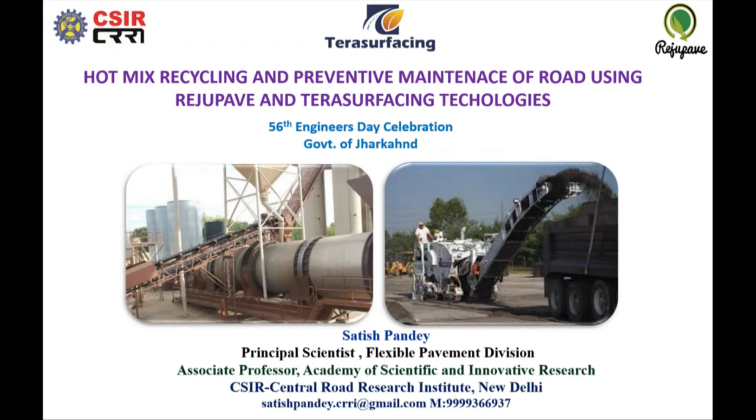In India, 95% of the road network is built through bituminous pavement. Bituminous roads, blacktop surfacing, is everywhere. And we know that every 4-5 years we require an overlay on top of it in order to improve the riding quality. This sort of overlay every year requires a good amount of natural aggregate as well as bitumen in order to prepare the bituminous mix, particularly dense bituminous macadam and bituminous concrete, which has substantial cost of production as well as requiring huge amounts of natural aggregates.

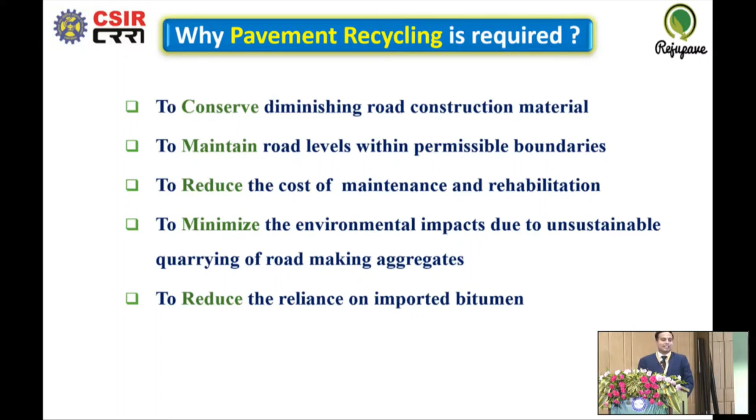As per an estimate, around 1.2 billion tons of natural aggregates are required every year in India for construction and rehabilitation of bituminous pavement. So now is the time when we should rely on the options of pavement recycling, bituminous pavement recycling, in order to reduce our reliance on natural aggregate and bitumen. Every year in India, around 60% of bitumen is imported. So if we can reuse the existing aggregate and bitumen for the production of fresh bituminous mixes, it will really be a great service to the nation, being a civil engineer.

In this direction, the CSIR Central Road Research Institute worked with Verma Industries, and under a sponsored research project, we have developed India's first bituminous rejuvenator called reju-pave, which facilitates 60 to 70% reclaimed asphalt pavement material utilization in bituminous mixes. As per the current practices prevalent under IRC and MORTH specifications, we can hardly reutilize 20 to 25% RAP in recycled bituminous mixes. But with the help of this reju-pave technology, we can reuse 60 to 70% RAP in the bituminous mix.

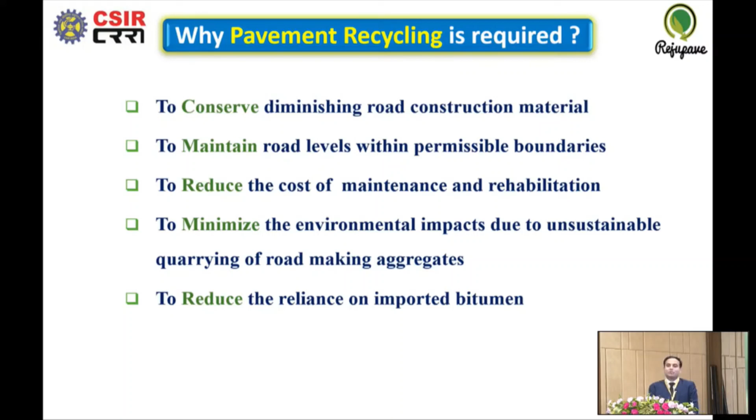The reclaimed asphalt pavement material, for your information, is primarily composed of natural aggregate and oxidized binder. When you mill the distressed bituminous surfaces, RAP is extracted, which comprises the natural aggregate and oxidized bitumen binder, and this binder in the RAP may be in the range of 3 to 4.5%. With the help of this reju-pave rejuvenator, we can replenish the oxidized properties of the bituminous binder and reutilize it into fresh bituminous mixes. So in parallel, we are reusing the natural aggregate retrieved from the distressed surface. Besides that, the bituminous binder, which is almost dormant, we can reactivate and reutilize into the bituminous mixes.

This rejuvenator is a kind of bio-oil based liquid rejuvenator which we can utilize directly into the bitumen tank along with the virgin bitumen binder, or spread directly on the pug mill on top of the RAP, reclaimed asphalt pavement material. With the help of it, you can redo or recycle bituminous mixes like dense bituminous macadam, bituminous concrete, semi-dense bituminous concrete, and also use it in stone matrix asphalt.

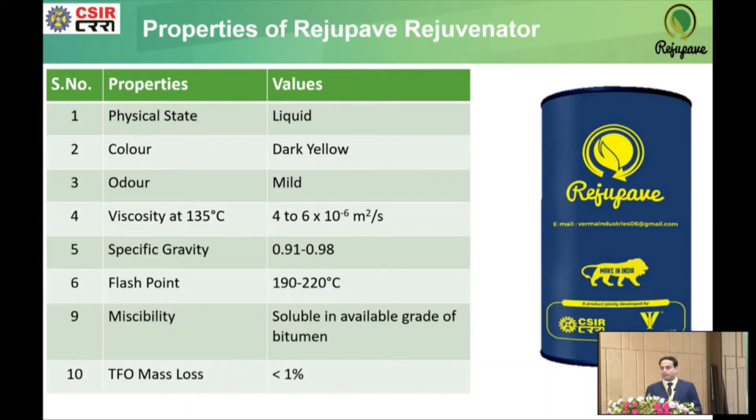On one of the NH53 National Highway sections in Surat, I am utilizing 50% reclaimed asphalt pavement material along with processed steel slag aggregate. So in parallel, whatever distressed material has been recovered, we are reutilizing it with processed steel slag aggregate, so there is no natural virgin aggregate inside it. The balance quantity of bitumen, about 1 to 2%, can be added with the help of a virgin VG40 or VG30 grade binder. In this regard, we have received the patent - it is India's first bio-oil based rejuvenator.

Most rejuvenators in India are imported, but this is the first developed through natural, renewable resources, and being bio-oil based, it is environmental friendly too. Since the majority of rejuvenators are derived from petrochemical material, but this is completely bio-oil based, it facilitates high RAP utilization without altering the rheological properties of the bituminous binder.

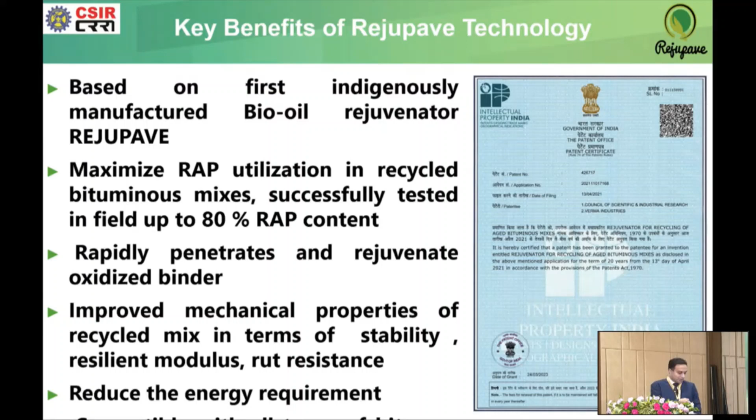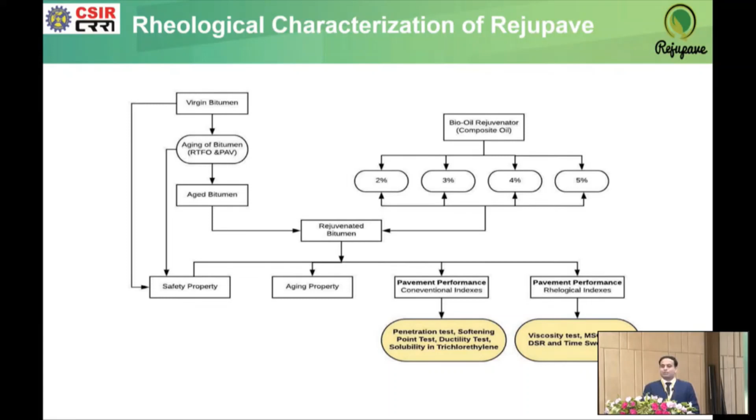We conducted extensive rheological tests during its developmental stage, which comprised dynamic shear rheometer analysis, pressure aging vessel testing, and all that - it's a complete scientific study. We have published a couple of papers on it, which you can find on Google regarding the technological aspects. Without going into the technical details, this is the dynamic shear rheometer test using RejuPave.

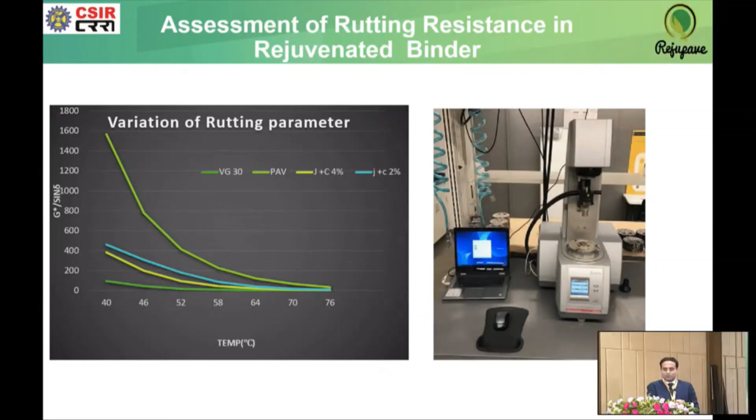I would like to highlight the process involved in the recycling aspect. So the majority of bituminous roads have surface cracks, map cracking on the surface, which is primarily due to the oxidization of bitumen.

But on top of it, if you do a bituminous overlay, if you put a new bituminous layer like DBM or BC, 30, 40, 50 mm DBM, 40 BC, after some time these cracks can be reflected into the new layer also. So the service life of your new layer will remain limited to only 3 to 4 years.

So when you put a new layer on top, what you normally do is use natural aggregate along with virgin bitumen to prepare a fresh mix. Instead, we can mill the material from the distressed bituminous surface, bring it to the hot mix plant at the project site, classify the RAP into coarse and fine RAP, and then develop a job mix using RejuPave rejuvenator. 60 to 70% RAP material can be reutilized into the fresh bituminous mix.

This brings down the cost of production by 30 to 40%. This is a substantial saving. Besides saving natural aggregate and bitumen, you are reducing the per ton cost of production of your bituminous mixes.

Now what are the added advantages? This is in terms of circular economy, conservation of nature, and all. What's the added advantage in terms of durability? This RejuPave rejuvenator retards the oxidation process of bituminous mixes. So if you put this rejuvenator in the recycled mix, it will prolong the oxidation process. Whatever new surface you are laying, this surface is going to last at least 6 to 7 years, as oxidative hardening will be very slow in this type of surface.

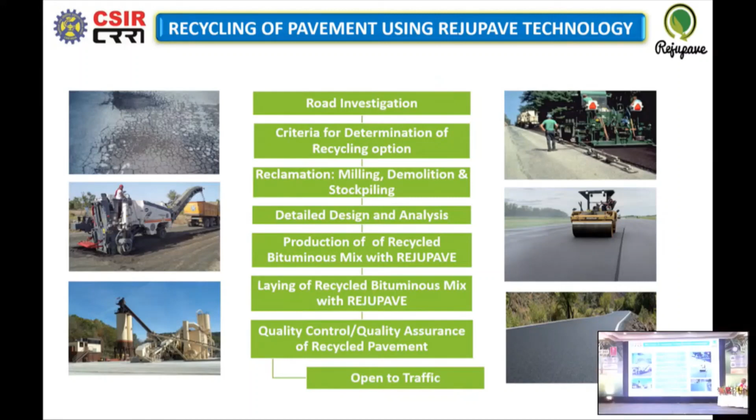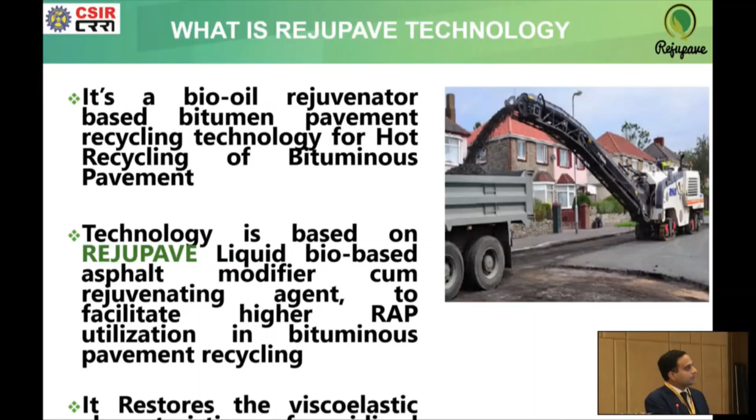So we demonstrated this particular technology on a couple of projects in India. This is a glimpse of one of the distressed bituminous roads of Delhi PWD. This is one of the ring road sections, one of the busiest roads.

Here you can see there is extensive map cracking. So we carried out extensive analysis by extracting bituminous cores to find out the quantum of distress and its depth, whether it was limited to the surface course or had gone up to the dense bituminous macadam layer. Based on that, we developed this entire study and extracted the bituminous material from the road surface.

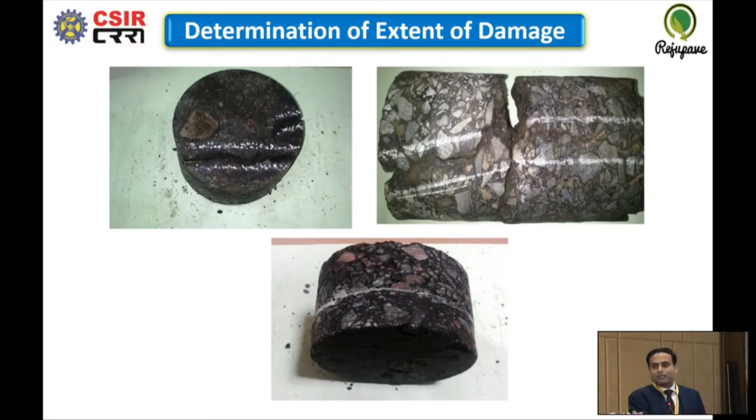This is a glimpse of RAP, reclaimed asphalt pavement material extracted from the distressed bituminous pavement. It contains around 3.5% bituminous binder, and a good quantity of natural aggregate. It is all natural aggregate.

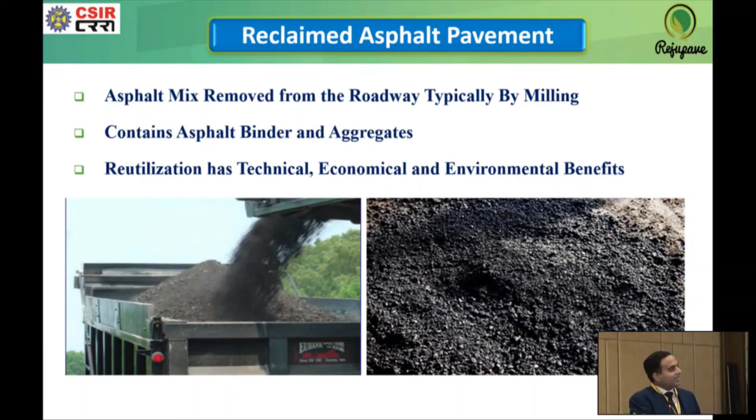So we reutilized this by classifying it into coarse and fine RAP, segregating it into minus 10 mm and plus 10 mm, and with this we devised a mechanism to put it into the hot mix plant and get it reutilized.

Pavement recycling technologies can be broadly classified into 4 categories: hot in-plant recycling, hot in-place recycling, cold in-place recycling, and cold in-plant recycling. So all your FDR technology is about cold in-place recycling. The majority of FDR technology is about cold in-place recycling.

But the major challenge in this kind of technology, whether cold in-place or others, is that all of them are stabilization mechanisms. It never gives you a perfectly bonded layer.

So it's a sort of a stabilization of an existing material, and the heterogeneity of the material is another major concern, since you never know what kind of material is coming out from the underneath layer, as the entire extraction, mixing and laying process is carried out at the same time. So there is no control on the material quality. Whatever material is coming out, it is going inside the pavement.

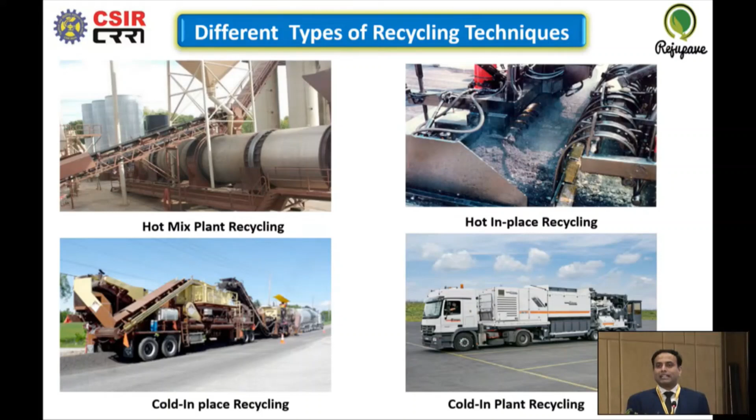But in case of hot in-plant recycling technology, since you extract the RAP from the bituminous layer and then segregate it into two categories, we have very good control on the mix properties. With the help of that, you can construct a good quality pavement surfacing at an economical cost.

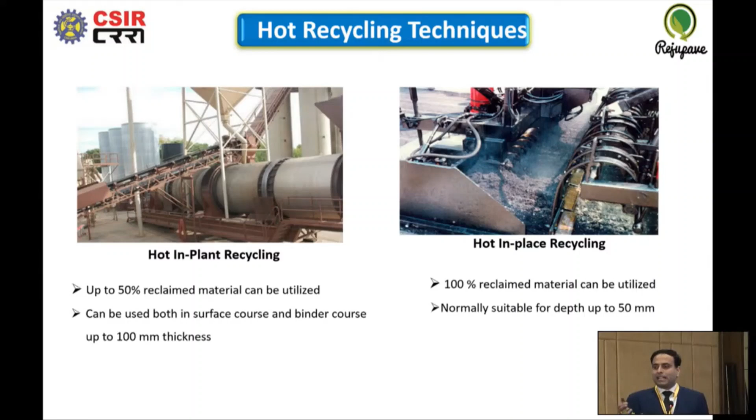So up to this hot in-plant recycling process, the maximum RAP utilization is 25 to 30%, but with the advent of this RejuPave technology, we have successfully utilized up to 70%. These are the typical hot mix, hot in-plant recycling plants, where we can add the RAP in multiple ways. Depending upon the mechanism of RAP addition, we can quantify the RAP utilization into the existing hot mix plant, and the existing hot mix plant can be refurbished for higher RAP utilization at a very economical cost.

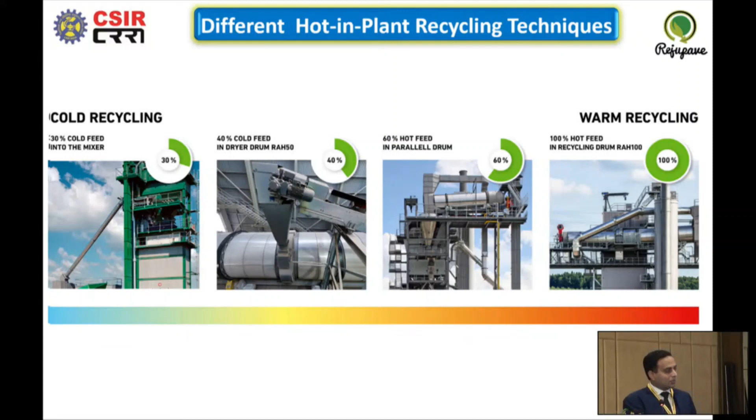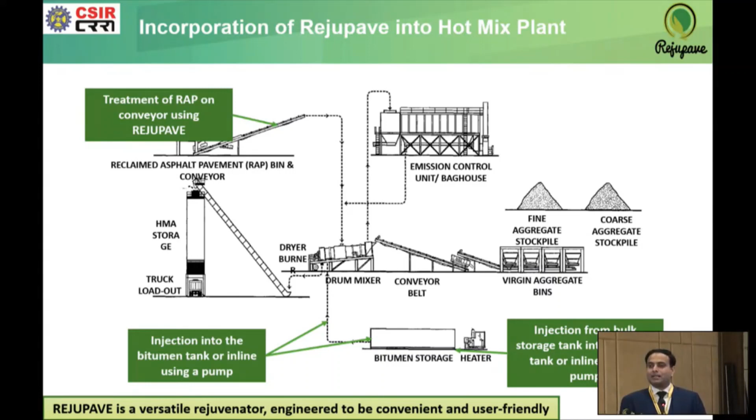Now where can we put this RejuPave rejuvenator? It can be added into the virgin bitumen tank at the requisite dose, around 0.5 to 1% by weight of virgin binder, so that too is quite economical in nature. Or it can be directly sprinkled on the oxidized RAP inside the pug mill. So these are the two ways we can put the RAP rejuvenator inside it.

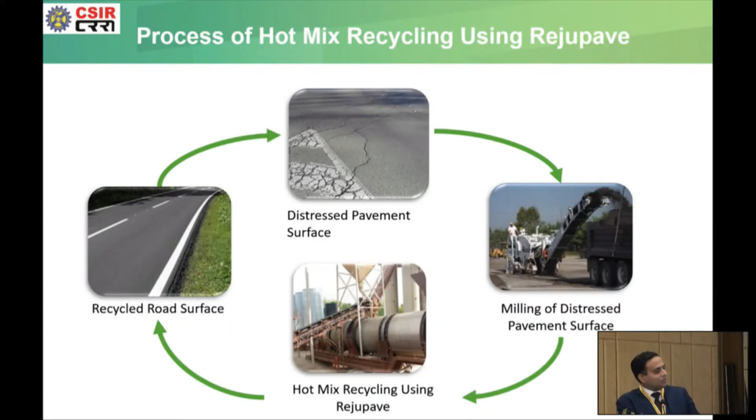So it's a glimpse of a hot mix plant where we can do all this. This is a typical cycle: a distressed pavement, then milling of the distressed pavement surface, then hot mix recycling using the hot in-plant recycling technique, and then laying of the recycled road surface.

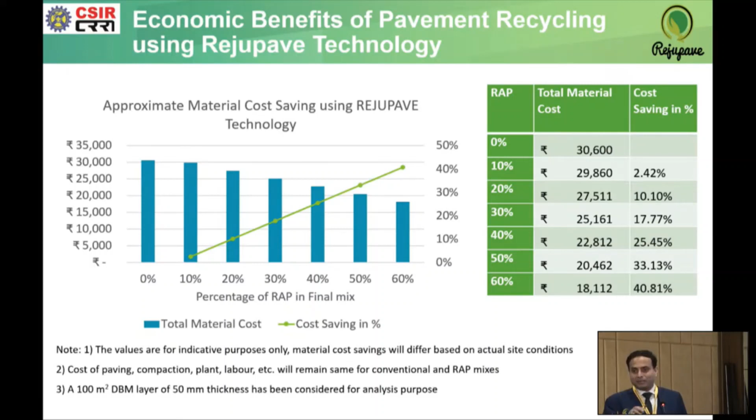Now in terms of cost saving, if we go with different RAP percentage utilization, right from 10% to 60%, then the net saving on the per ton production of bituminous mix will be 40.81% reduction in the cost of production, since that much quantity of aggregate and bitumen is being saved. So it's altogether a very cost-effective, economical and eco-friendly process, since you are reducing energy consumption as well as greenhouse gas emissions, as we are not putting in any virgin material, whether aggregate or bitumen, for the construction.

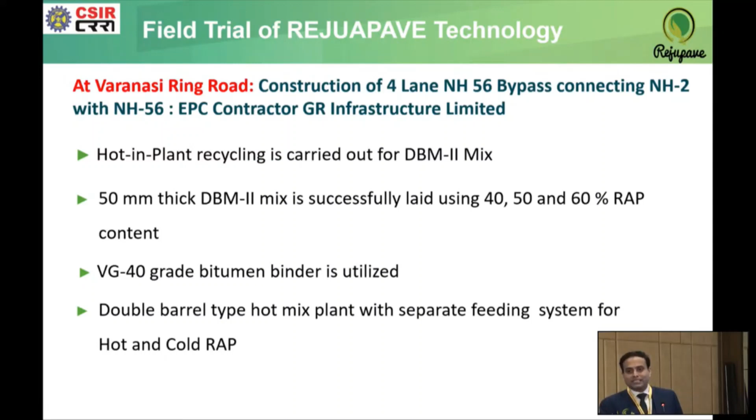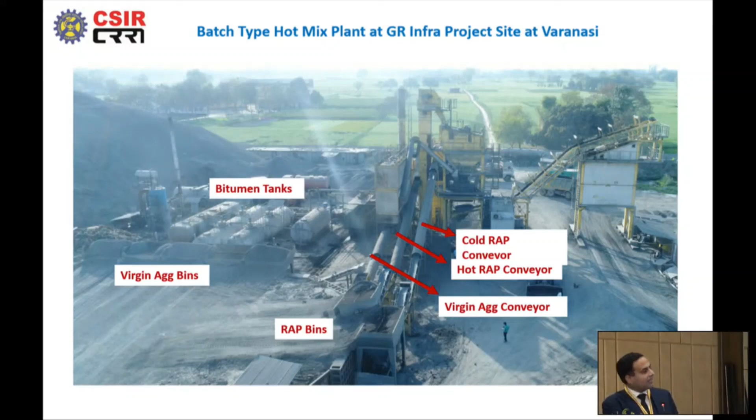So this is a glimpse of the different roads we have constructed so far using this technology. The first project is the Varanasi ring road project with GR Infra. Here we utilized the Marini hot mix recycling plant, and we used RAP in the tune of 40, 50 and 60%. This is a glimpse of the Marini plant.

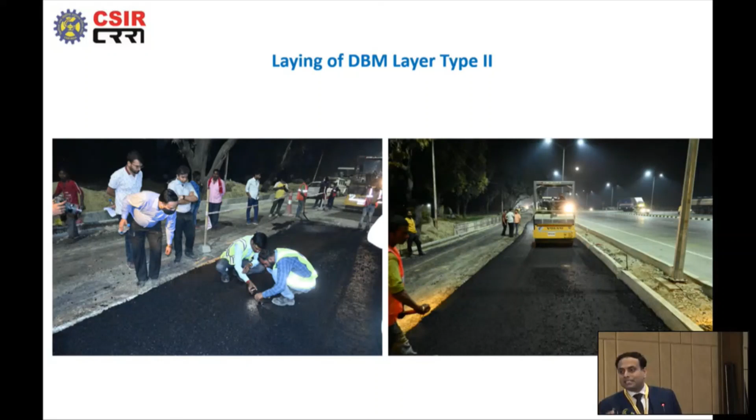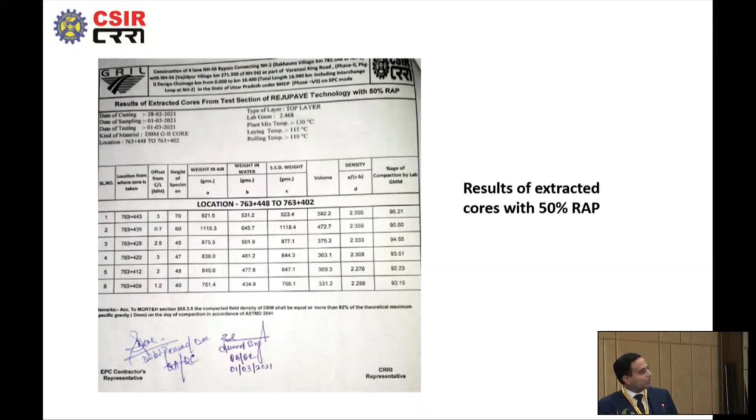So it's a kind of a very big accomplishment on the project site. These are the test results we have recovered, duly signed by the GR Infra road project team as well as the CRRI personnel. Now the second project is on NH34 with Cube.

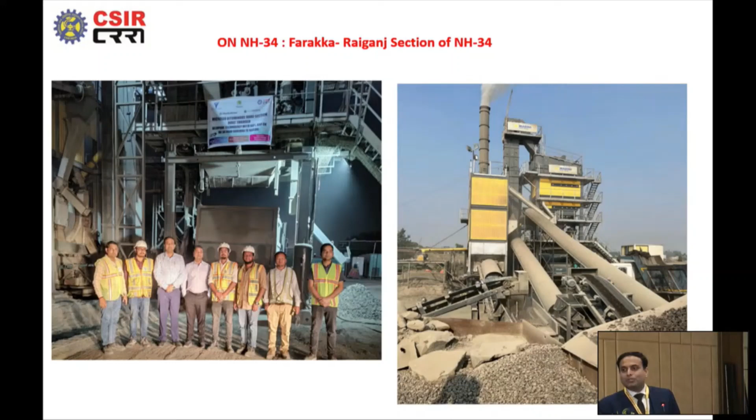On this particular location, we once again utilized RAP in the tune of 50% by weight of the overall mix, and we constructed around 1.5 kilometers of a 6-lane section there using this particular rejuvenator, utilized in the binder course layer, dense bituminous macadam layer, with polymer modified bitumen. The virgin binder was polymer modified bitumen, but the RAP was containing VG40 grade bitumen, and we utilized it for the construction.

And now, henceforth, we are utilizing this for the construction of NH53 as well as two projects in Delhi PWD, where we are using this particular product for construction.

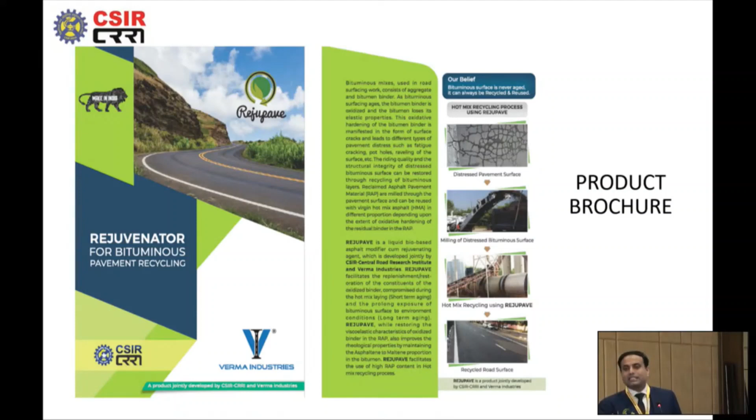So in similar fashion in the state of Jharkhand, for the rehabilitation of distressed bituminous road network going on for fresh bituminous overlay, you can adopt hot in-plant recycling technology, which can not only save natural aggregate and virgin bitumen but also preserve our ecosystem, since it reduces our reliance on natural aggregate, which in turn reduces the quarrying and mining of natural aggregate causing serious environmental impact across the nation. So that's all about Rejupave.

The next one is Terasurfacing technology. Let me give you a brief about it. It's a preventive maintenance technology of 8 to 10 mm thickness. One important aspect is that we entirely use industrial waste material - it's based on fly ash, steel slag, or marble dust.

In Terasurfacing, we can utilize 100% steel slag fine as a substitute for natural aggregate for preventive maintenance of the road. The thickness of this treatment is around 8 to 10 mm. It is completely an ambient atmospheric temperature based technology which does not involve any heating of bitumen and aggregate.

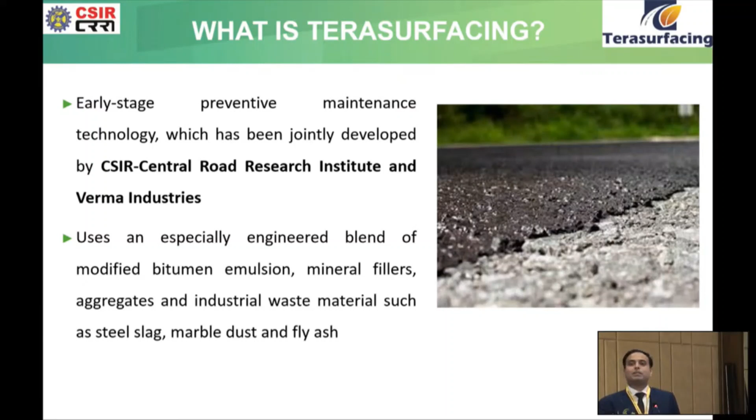All of you might have heard about the micro surfacing technique, where an 8 to 10 mm thick layer can be laid on the road surface for periodic renewal or preventive maintenance. In place of that, Terasurfacing is specifically based on the industrial waste steel slag. With the help of a micro surfacing machine, you can lay this special treatment on distressed bituminous roads, and prolong the service life of the existing bituminous surface. We carried out successful implementation of this technology at 4 locations in India.

Recently we accomplished this work in Surat, Hazira, where we utilized processed steel slag aggregate fines of ArcelorMittal Nippon Steel for construction of this road. One important aspect is that it's a quick rehabilitation method - in situ preparation and in situ laying mechanism. You can open the road for traffic movement within 2 hours itself, since there is no heating of aggregate and bitumen involved. Besides that, the cost of maintenance is also very less.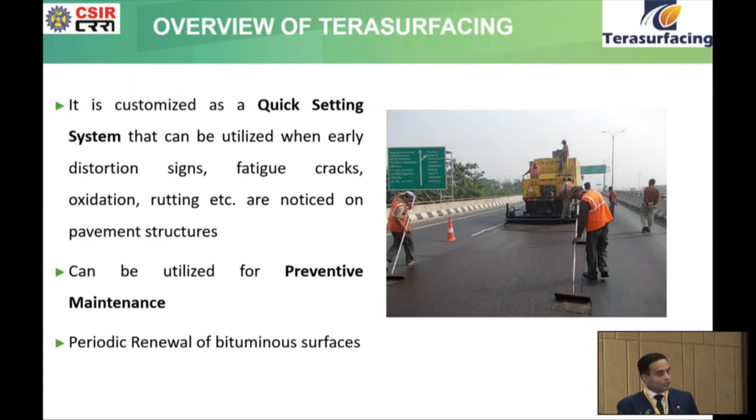The entire cost of the treatment varies between 120 to 140 rupees per square meter, which is substantially economical compared to conventional treatment. Another important aspect is that if your cement concrete pavement is showing early signs of distress, this Terasurfacing layer can be put on top of it, and it will reduce the quantum of cracking in the surface. So that's a glimpse of the preventive maintenance benefit using Terasurfacing technology.

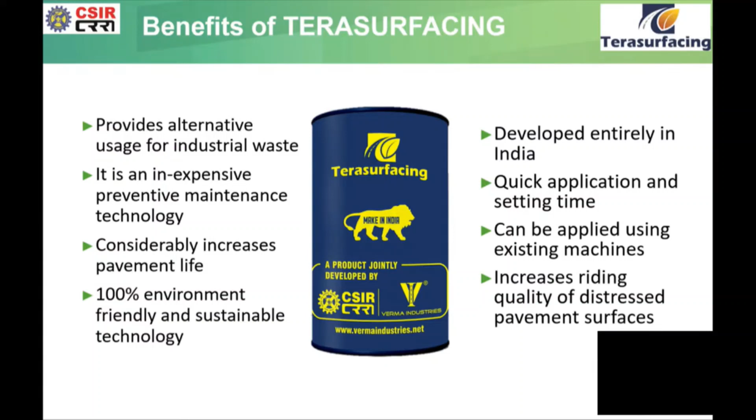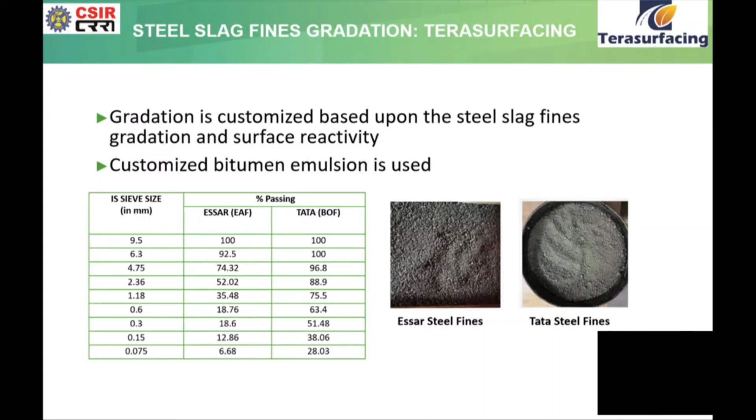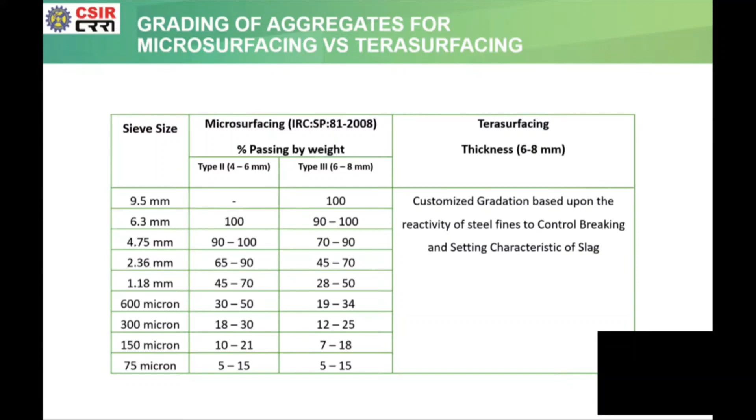You can do it in the state of Jharkhand using Bokaro Steel Plant's steel slag, as well as Tata Steel Plant's. It's once again a technology which promotes the circular economy, since it reduces the generation of waste material. We are utilizing the waste for road construction, so it's a kind of waste-to-wealth scenario.

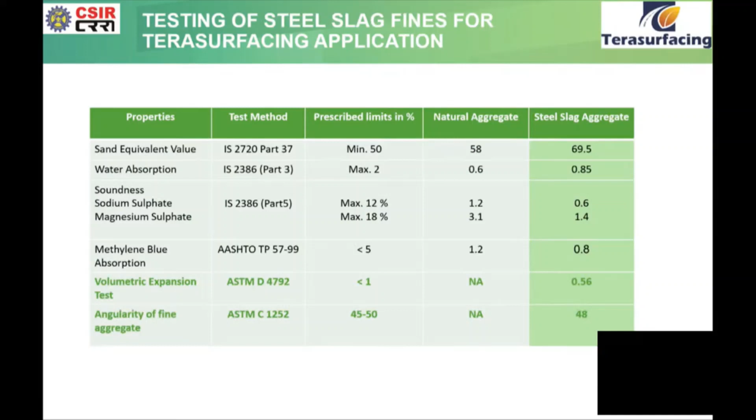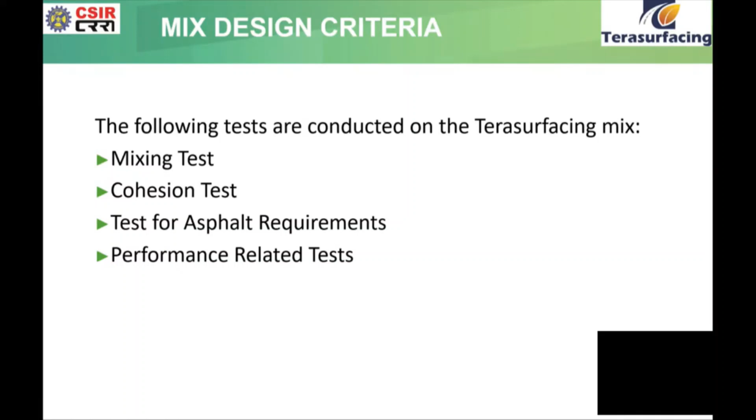These are the mix design parameters developed by CSIR Central Road Research Institute, and this is the application parameter, with the help of which we can go ahead. These are the different tests required to carry out the mix design, comprising mixing test, cohesion test, test for asphalt requirement, and all. It's a kind of typical technical mix design methodology which we need to follow.

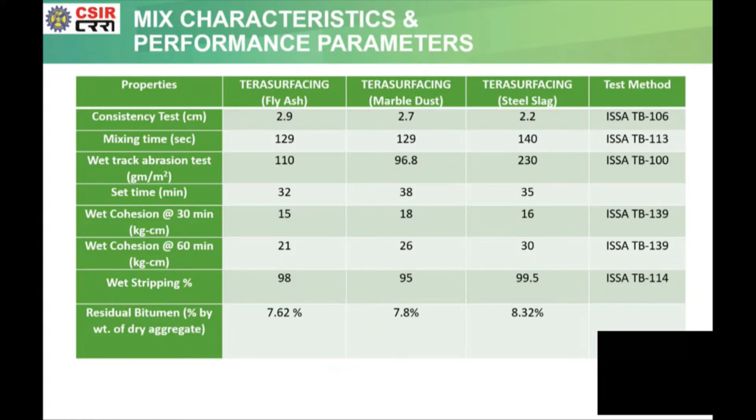This is the mix design parameter which has to be achieved while carrying out Terasurfacing with 3 different types of industrial material - whether it's fly ash, marble dust, or steel slag. So if you have any of these materials available nearby, you can adopt this technology in place of natural aggregate, and we can construct the road using it.

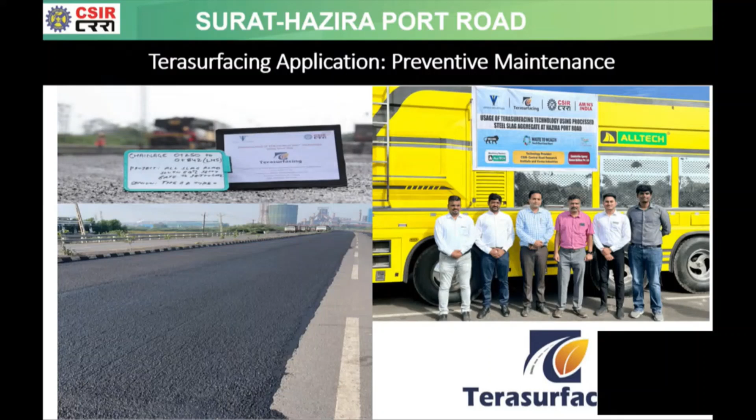This is a glimpse of road work which we recently completed at Surat, Gujarat using Terasurfacing. In this project, we utilized the steel slag fines of ArcelorMittal Nippon Steel, on the Surat Hazira Port Road, where we used this material for construction of the Terasurfacing layer on a 2.5 kilometer long, 6-lane road. The entire road is treated using it with substantially less cost.

This Terasurfacing and Rejuve technology we have developed along with Burma Industries, and both are green technologies to construct green infrastructure, which can be very beneficial for the Government of Jharkhand. That's all from my side. Thank you very much.